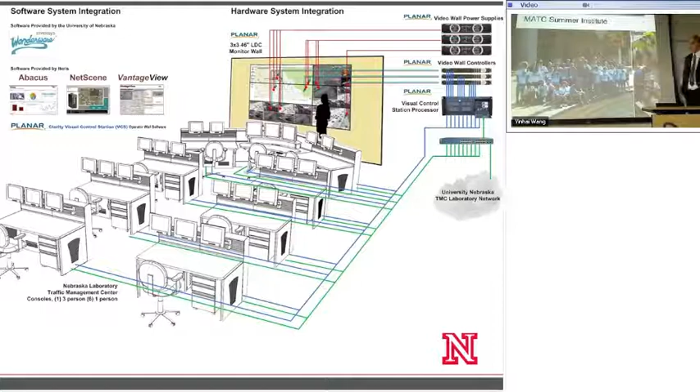We work with students. We have a summer institute that we've run for 6 or 7 years, where we work with teachers and students trying to get transportation into our curriculum in the middle and high schools. We have an after-school program that's been around for about 3 years. It's expanded to 12 schools in 3 different states.

Very, very successful. What's nice about this from a student perspective is we actually hire students to go work with the schools in the after-school program. So the students will go work with middle school, high school kids on these really hands-on experiments, and hopefully get them interested in staying in the STEM fields.

We have an intern program, I think very traditional in most UTCs, where we find students and we find companies that would like to hire students, and we probably have about 40 to 50 interns a year across our region through our program. We also have a scholars program where we look at getting underrepresented groups interested in transportation and pursuing advanced degrees. And we run that every summer as well.

And this last year, we started to videotape all our presentations. We're going to put that on the website. Any student anywhere can benefit from it. We were talking earlier today about sharing courses. We do a lot of shared courses. For example, we have a railway course that we share amongst the universities. And I think that's going to be the future of a lot of the things we're doing. It allows us to get courses we might not have been able to offer at each individual school throughout the consortium.

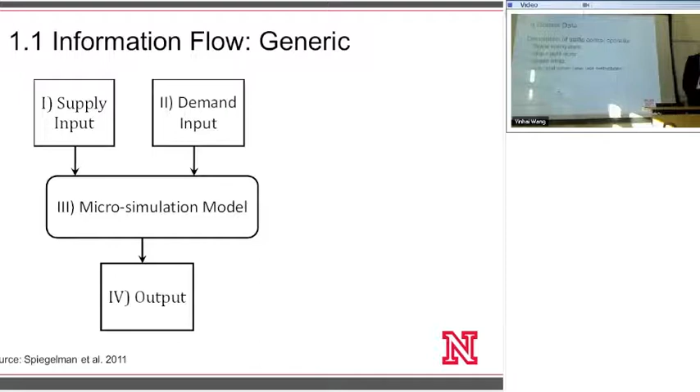So that could be anything, right? Number of lanes, lengths, curvature, channelization. And it's very traditional. I just took a screenshot of one of our networks where we have freeways and arterials. Within that, of course, we also have the control data, traffic signal timings, how much green time, what's the cycle length, all those things. Is there a managed lane or not?

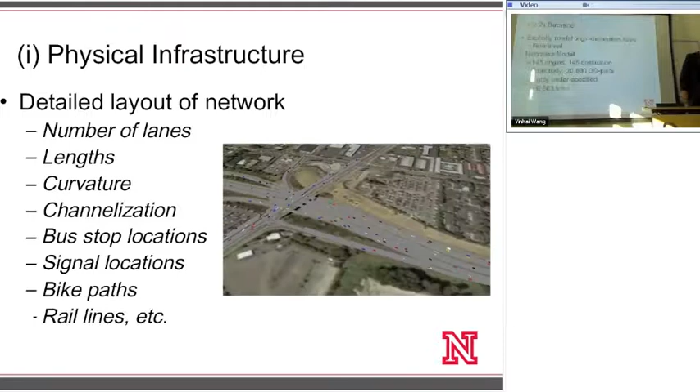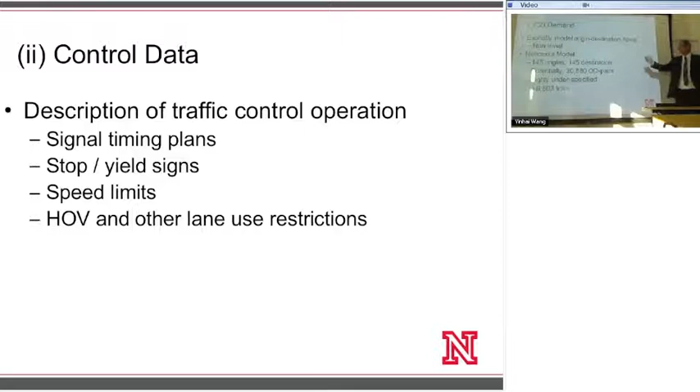On the flip side is the demand. And you get to put the demand in a variety of ways. Most will be talking about origin destination matrices, where people are coming from and where people are going to. I'll be talking about the Nebraska model. We have a model of our entire freeway system in eastern Nebraska, went over on each arterial to the nearest traffic signal. So it's about 70 miles.

Even this simple model of 145 origins and 145 destinations has about 21,000 OD pairs. On our links, we have 68, so we're highly underspecified. It's a highly underspecified problem. We can collect 68 pieces of data, but we're trying to estimate 20,000 things. It can be kind of complicated. And I'll come back to that point in a minute. Many other attributes with it, number of vehicles, vehicle types, all of those things.

So we have our supply, we have our demand. Demand in microsimulation models can sometimes be put in on the simple models as entry volumes and turn proportions, and those are the older style, or you can put them in as OD matrices. And it does make an effect. This is one I use with our students when I'm introducing the topic.

You could go out, as you can imagine, having 2 origins and 2 destinations, measure some flows, 1,000 vehicles, 2,000, and you can say, well, what's the OD? And you could say, well, there's one where you have 1,000 at origin 1 going to destination 1, and 1,000 at origin 2 going to destination 2. Right? So a very simple origin destination matrix. But also, you could quickly figure out, even for this simple network, there's another one where you have almost the opposite. Everyone from origin 1 is going to destination 2. Everyone from origin 2 is going to destination 1. And both will give you the volumes you see.

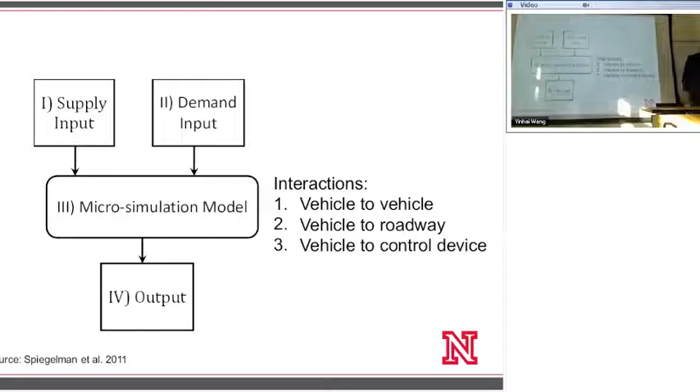And this is a model in somewhat small increments, typically 0.1 seconds, although different models do it at different levels. And really looking at the internal processes, the driver's decisions, the vehicle characteristics, the signal operations. So getting back to that original diagram I had, we have these interactions: vehicle to vehicle, vehicle to roadway, vehicle to control device. That's essentially the microsimulation model in a nutshell. I'm going to try and run ours.

And it didn't work. Okay, there we go. So here's a picture of, we just took one place out of this Nebraska model. It's about 60 miles, so this is one of our interchanges. And they can get pretty, you know, they look great. This is VISSIM, very good program.

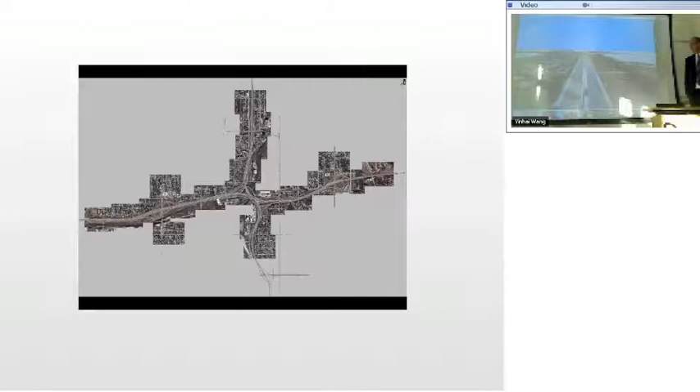You can make it look very nicely. You can do trucks, you can do cars. We take these out and show people, and they like them. It makes sense. It looks nice. I think the real question though is, how good is it? It looks great. And the question we always have was, is it really doing what we want to do? And that's sort of the focus I want to talk on today.

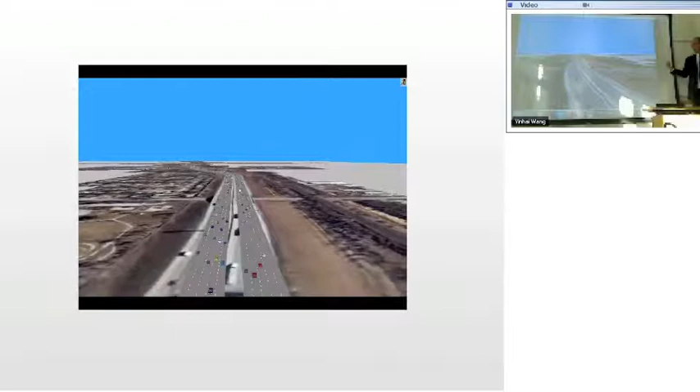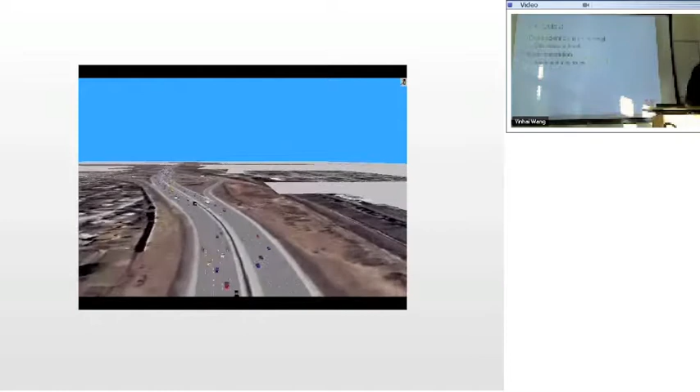How accurate do you have to be, or how can you make this model as good as it can be, is probably a better way of saying it. So you run the model, you get output, you can get a lot. You can pick a time interval. You get to decide the form and the frequency of the output.

As you can imagine, there's three types. You can get point measures. What's the speed at this point? What's the throughput at this point, or at these locations of points? You can get link-based. What's the travel time on a link? What's the space mean speed?

You can do corridor system measures. What's the average vehicle speed along a route or along a corridor? What's the speed or travel time from an origin to a destination? You can get average person delay. There's all kinds of data you can pull out of these models if you want. The user gets to decide, and it makes sense. You have all the information from that simulation. You get to pick what you want.

Of course, it can be overwhelming just how much data there is. So part of the thing you have to do as a modeler is identify how accurate the performance measure needs to be. So you're getting this data out. How accurate does it have to be? And I'll come back to this theme as I talk today. And there's another caveat I always talk about. You also have to understand what you're trying to do. We always talk about we want as accurate a model as possible.

Sometimes it's not as critical to be absolutely accurate. Sometimes it's okay to be relatively accurate. So the question, does it all have to be accurate? And the answer is, we'd like it to be, but does it really have to be? And it comes down to what you're doing.

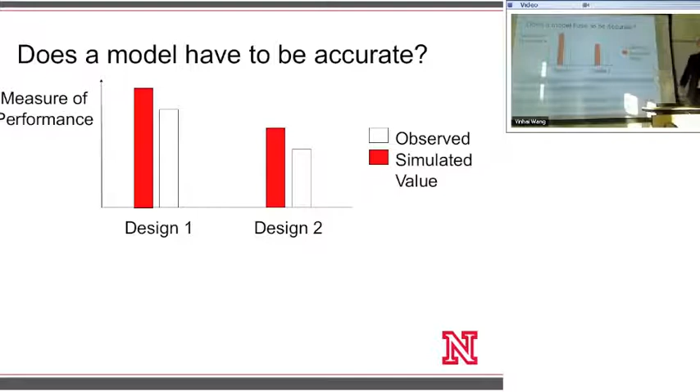You can see that the simulated data in this case overrepresents what's actually going on. But the reality is the relative benefits of both, whether observed or simulated, are the same. So sometimes, as long as you're looking at relative benefits, the model, whether it's a microsimulation or macroscopic, may not need to be accurate. It just has to be accurate in relative terms. It allows you to pick the right choice.

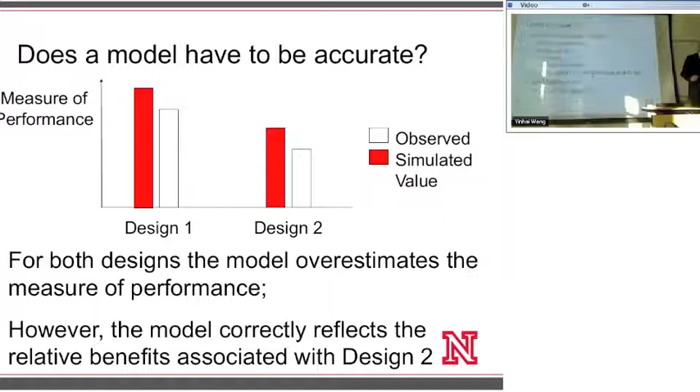So lessons learned: we don't need an accurate model. We sure like it to be internally consistent. I always say it needs to fit the need, right? Is it planning? Is it operations? Are you doing safety? And it should model reality. I'll come back to this last point at the very end of my talk.

And the other thing is, as I discussed, we have lots of data on these models. And as the title of my talk indicated, we have lots of data. We have our ITS data. We have the ability to collect a lot more data than we did 20 years ago. In fact, we're collecting so much we're hardly using any of it. So what do I mean by ITS data? I want to talk about the types and advantages, and then how that relates to microscopic simulation.

So we have point data, and I think you're all very familiar with that. We have video data, we have inductance loops. In Nebraska, we use a lot of radar to get our data. Our state DOT gets their data for free because someone's gone in and put up all the radar detectors for them, and they just wanted permission to be on the right of way. They collect the data, sell it to others, and give it to the government for free. Completely different way of doing things. And you get information like spot mean speed or throughput.

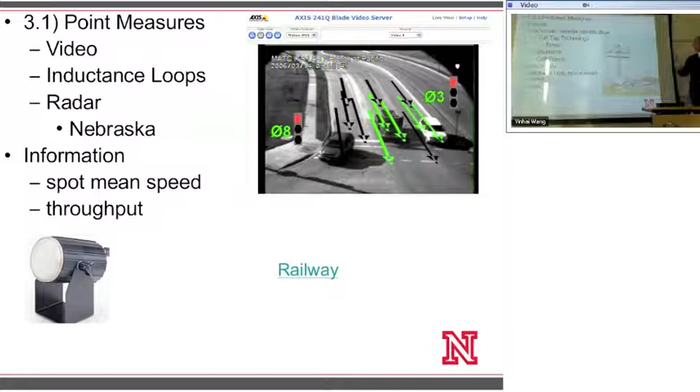Talk today about Bluetooth, right? Very similar technology. Cell phones. This stuff is becoming more and more prevalent. It's a lot nicer because it gives you actual information over space, right? What's the travel time? What's the space mean speed? What's the delay? Those types of things.

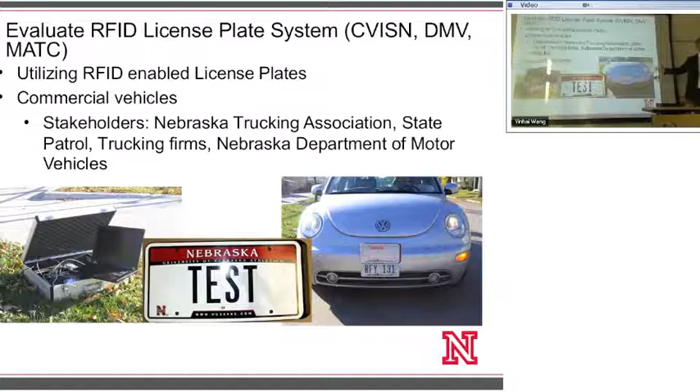We had a project in Nebraska where we were looking at actually putting RFID into our license plates. And this actually came about from the trucking associations, because they already have RFID on their trucks. They have license plates. They said, can't you put them together? Is there a way we can work together to work this out? So technologically feasible, politically I'm not so sure about. But you may see this in the future where our license plates actually have information on them, much more than just the visual part of it.

Another example, this is a summer project we did about a year and a half ago. Commercial vehicles, if anyone's familiar with the trucking industry, have a lot of GPS data. They get information on where your truck is, where the engine is, what the engine's doing. Is the truck going fast? Is it going slow? Are they doing hard accelerations? So they monitor the drivers to make sure the drivers are where they're supposed to be and are driving the way they're supposed to be.

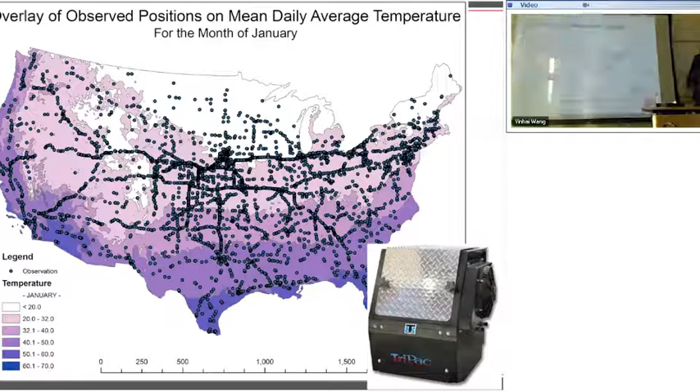And the whole industry has basically set up a system where they take that information, bring it to a central source, and provide it to each other. So they actually have very good ideas of what's going on, travel times for trucks, delay times for trucks, where congestion is. They put out a top 20 congested list, and they give it to the government every year. This is where our trucks are having trouble. This is where you need to put your money. They put out maps on where their congestion is. So it's very interesting that this data the government used to collect, now the private sector is collecting, sharing amongst themselves, and using for policy.

So lessons learned: there's a lot of ITS data collection historically by the government. What we're finding is private sector companies are collecting the data themselves, using that and providing it to others. A lot of potential for public-private partnerships. What is important for this talk is there's lots of very robust individual data, which mimics the microsimulation outputs. So not just point data, we're actually getting link and route type information, and that's pretty key for doing calibration.

So having more robust individual data allows you to think about things such as the mean, the variance, the distribution of data. And if we have that, and that's what microsimulation gives us, it gives us an opportunity to compare how our simulations are doing against the empirical data, and not just one measure, but maybe other measures as well.

When I say lots of data, I mean terabytes. Our labs probably have right now 18 to 20 terabytes, and we're running out of space. The issue of how you manage this data, I'm not going to talk much about today, just that we have data. Trying to turn that data into information you can use is a whole other topic. How do you archive that?

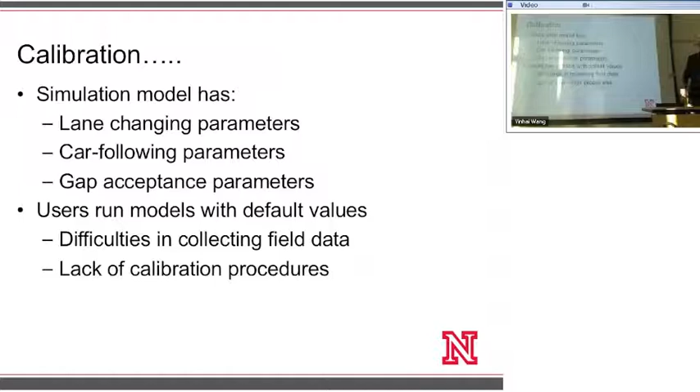So getting to calibration, when you look at a simulation model, they have all kinds of parameters: lane changing parameters, car following parameters, gap acceptance parameters, and I just listed a few here. There's a large number. A lot of times users will just run the model with default values. Sometimes there's difficulties in collecting field data, or just a lack of calibration procedures. I'm hoping to show today that it's probably a bad idea. My experience has been that it rarely replicates field conditions to the point that some people would like.

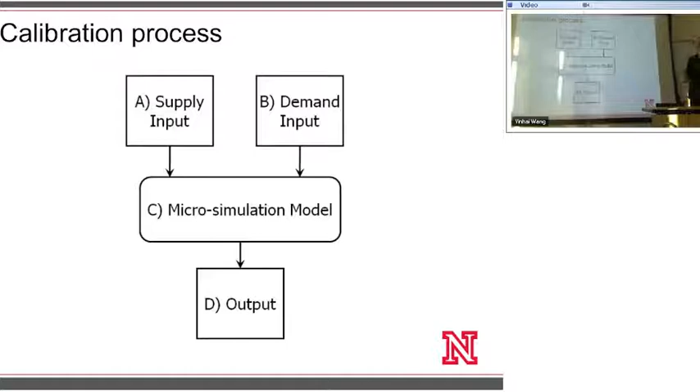And so a lot of our work is discussing ways of calibrating, but also showing the need for calibration and validation. So getting back to our diagram, we have supply, we have demand, we have this microsimulation model, we have output.

Setup, well, go get some data. So you could go collect it yourself in the field. You could use some ITS data. What types of things can you use? We saw today you could use queue length, you could use speed, you could use travel time.

Which one's best? Well, it depends, I guess, on what you're trying to model. Right? What is critical to you? Are you doing a safety analysis with your microsimulation? Are you doing a speed analysis with your microsimulation? What exactly are you after? But there's a lot of things out there you could use.

So you might take every link, see what your observed was, what your simulated was, and this is actually sort of a percentage error. So if it was 0.1, it means about 10%. You're off by about 10% on average over all your links. So that's the mean absolute error ratio, and I'll come back to that in a minute.

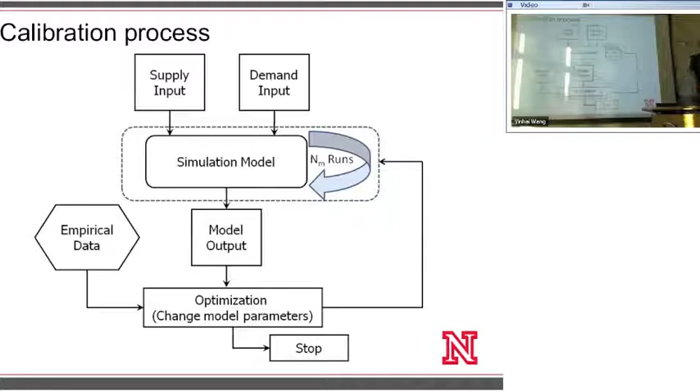And if you don't like it, then you go back and you repeat it. You can adjust the parameters until the data matches, which makes sense. So you go back, you put a new loop in, you go back up to the simulation model, you make some changes to the parameter, you run the model again. Right? You just keep doing that until you find some reason to stop. You're satisfied with the numbers, statistically it's fine. You have a low mean absolute error ratio.

So that's basically the calibration model right there. So you find the lowest mean absolute error ratio, you can run a t-test. A quick question would be, why not all combinations, right? Why don't you just run every combination of parameters and get that? That'd be fun. That'd be a good grad student project, right? So you can argue there's usually 30 parameters you could change. I'm not going to read these out, but there's a large number that you have the ability to change and affect the results.

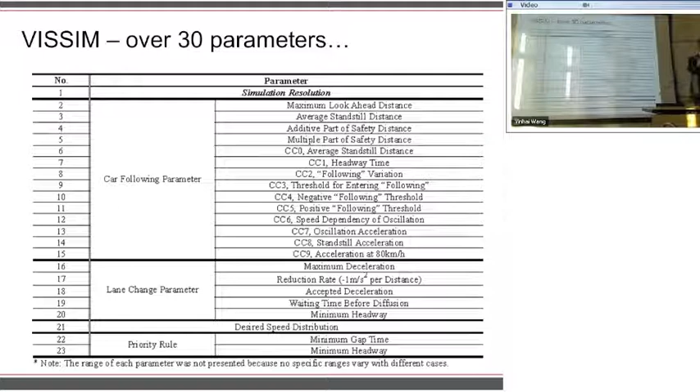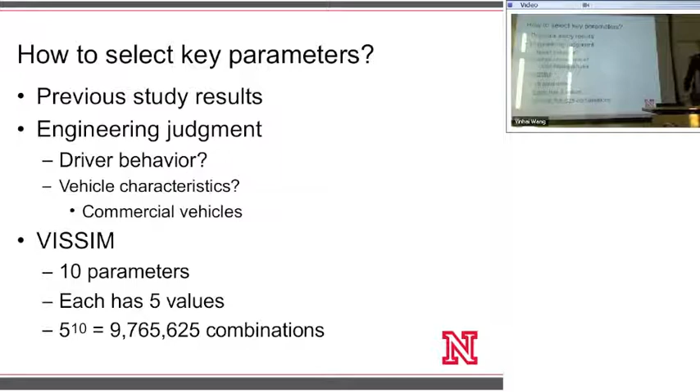How do you get the key ones? Well, you can go to previous studies. You can use engineering judgment. You know, I'm interested in driver behavior, and this is what I'm looking at, so I'm just going to worry about the driver behavior parameters. It could be vehicle characteristics, right? The vehicles there are calibrated in this region of the country, and our characteristics are different, so I want to calibrate to those. But even if you took VISSIM with 10 parameters and each had 5 values, it's probably about 10 million combinations. So the ability to do every combination is not possible. So I'm going to have to do some type of optimization.

One caveat: where did the demand OD matrix come from? That's sort of where I started from. I started off with this OD and said, these are difficult to get, even for a simple two-node example. I'm sure the students all know where the OD matrix comes from. And that's that second arrow coming back. We estimate. We get synthetic ODs. We estimate them from volumes. We have models for doing that. And where does the data come from? Well, it comes from the ITS data, typically, some type of volume, some data you're using.

So you get this sort of double loop where you're using the empirical data to identify your OD, you're running your simulation model, you're getting your model output, you're seeing how good it is, and then the question comes up, should I be optimizing on my OD matrix as well? And we have done that work as well, and you really are into 2 types of optimization. You hold the OD constant and optimize the simulation model, or hold the simulation model constant and optimize the OD. I don't think there's a right or wrong answer other than to know the ODs are not easy to get, and they obviously are going to affect everything you do. A lot of the work we do, I try and keep it simple so we don't have a large number of options on the ODs. So a lot of corridor work, those types of things.

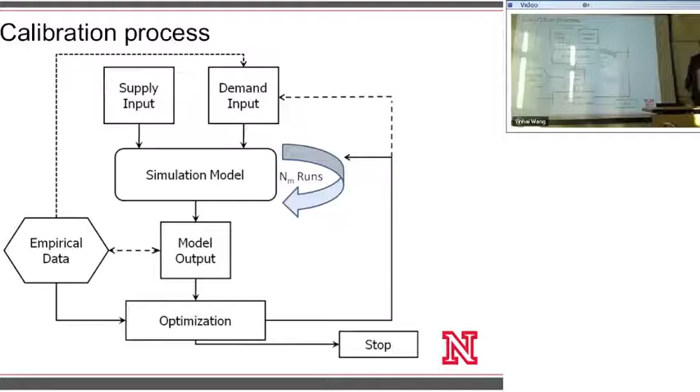So calibration methods. When I started out doing this stuff all those years ago when I was in the student seats, we did it manually. It's better than the default. I will say it's tedious and time consuming. You can only do a small set of parameters. I don't recommend it, but that's what we used to do. It would take you a month of playing around, hopefully kind of intelligently, running the model, seeing what the results were. And I say it took a month because that's probably what most people had, a month or 2 to try and get the model working. And they were much simpler.

But when you look at the loops that I showed, you can certainly see, well, I could do that with a computer. Right? I can automate this process. In fact, if you have the right set of computers, you can send a simulation to each computer, run it, get the results, change things. And so that's sort of what we do. You could do an experimental design, and we certainly looked at using things such as Latin square design, where you identify the combinations ahead of time. So instead of 10 million, you're doing 300, 400, 1,000.

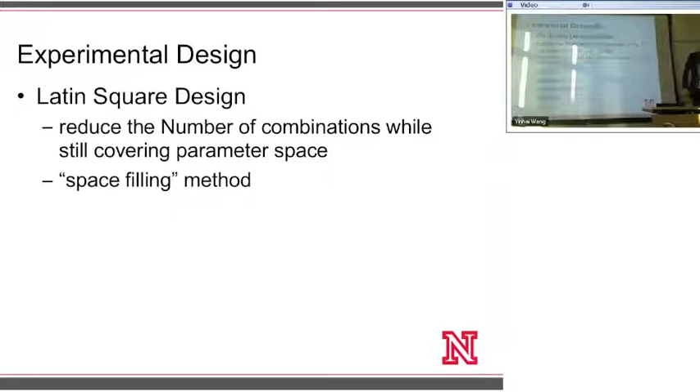What we tend to use now, though, is more of an optimization function. So we've identified what our objective function is. It could be lowest mean absolute error ratio. It could be something like 90% of link travel times are within the empirical confidence intervals, something like that.

The optimization, there's a whole bunch out there. There's reduced gradients, simplex algorithms. I've used all of those. I'm going to talk today about genetic algorithms because it's been a fairly popular one. But I will say that almost any of the ones we've tried have all come up with good answers in the process. So there wasn't any of those that we've used and we said, oh, that's awful, we shouldn't do that. So I'm going to do a calibration example for you.

Okay. So we take our traditional measures of similarity. I'm going to pick the mean absolute error ratio that I showed earlier. First question, what are you interested in? Are you interested in the mean? Are you interested in the distribution? Right? And the answer is always, well, what do you want from your model? Do you want to just get an average value? Do you want to get the distribution?

Are you interested in reliability, the distribution of speeds? Are you happy with just the mean speed? Are you interested in the 85th percentile speed? That's the sort of question you have to ask yourself before you do the calibration. That's going to define how detailed you want this. In this case, I'm going to look at the closeness of the observed and simulated travel time distribution. So I've made the choice that I'm interested in the distribution of travel times. That's what I want my model to be able to replicate.

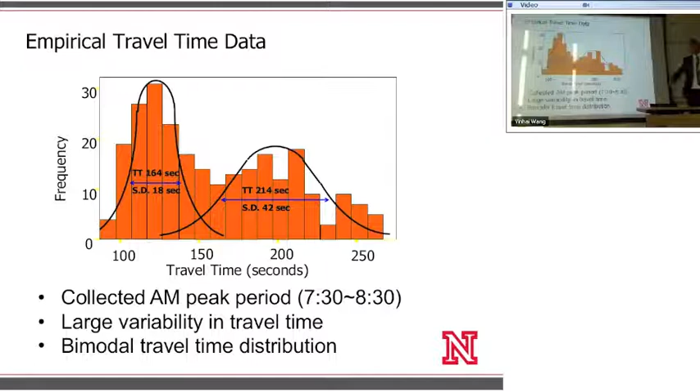Can we adjust the parameters so that what the model is outputting is what we're seeing in the field in terms of distribution? And you can imagine if we're doing the distribution, then the means will also be correct. If the distribution is close to correct, the measure of central tendency will also be close to correct. So that's our process. We run the simulation model n times, it really depends on the metric, and we usually pick 10, and that seems to work well. But again, it depends on how accurate you want your calibration to be.

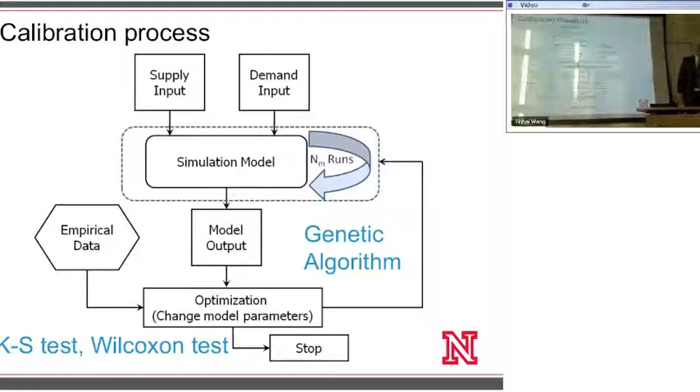So here's our automated procedure. I'm going to go through this fairly quickly. You have the genetic algorithm, you have an initialization. You pick a bunch of potential parameter sets that could work. You could pick them through engineering judgment, from previous work, or make them up randomly. In our case, we picked 30.

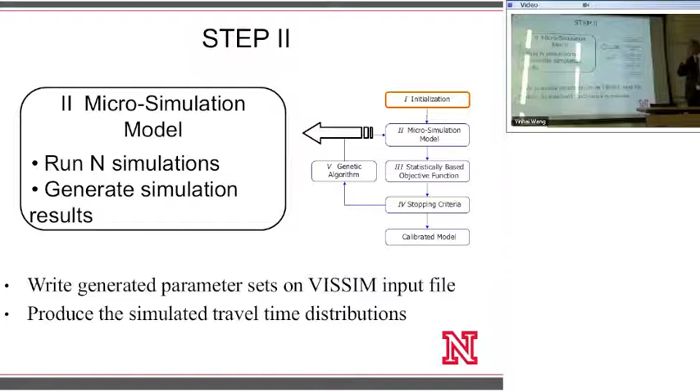I'm not going to go into the details of the genetic algorithm, but there's ways of picking numbers, like the mutation probability and crossover probability, that are going to give you new parameter sets. So you pick a set of parameters, you run the microsimulation, and you get results. You then compare the results statistically using the KS tests and the Wilcoxon test, and you say, of all those 30, did any of them pass our test? Basically the way the genetic algorithm works is if they did pass a test, they have a higher chance of being adjusted and sent in for the next iteration.

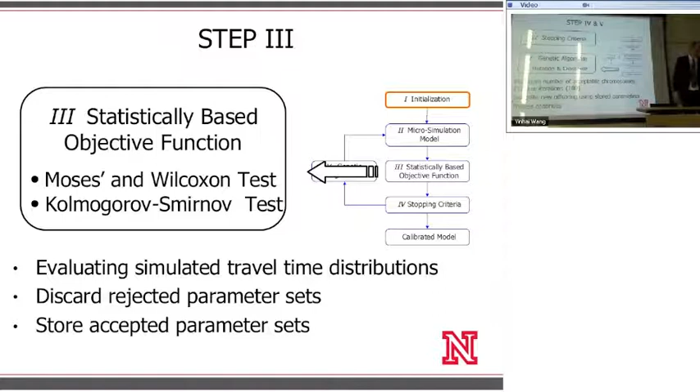And we'll run this over and over again. So we run some tests, we get some mutations to our parameter set, we change the parameter set in some way that mimics biology. We get new sets, and we just keep running this over and over. In our case, we did 100 iterations. And the idea is that if something's good, you continue it to be good, but you do have some randoms to see if there's maybe somewhere else that you can get better results.

So that's the genetic algorithm, and like I said, you could use a simplex algorithm. There's a number of optimization methods to mimic this, to change this thing as you go through. The next thing is from a student's point of view, right, you push the button once, and it just does it. And like I said, if you're doing this by hand, it's not any fun. But this allows us to do thousands of these runs and look at it. We're not doing a million, all different combinations, but we do get to look at the sample space and try and find ones that work.

So what are the results? Well, the first thing was if I just ran the model with the default parameters, so I just took VISSIM off the shelf and ran it for this network, there was a 21% mean absolute error ratio. So on average, the travel time was off by 21%. This is actually a really good number. We've run it where it's been off 100, 120, 130, just taking the default parameters.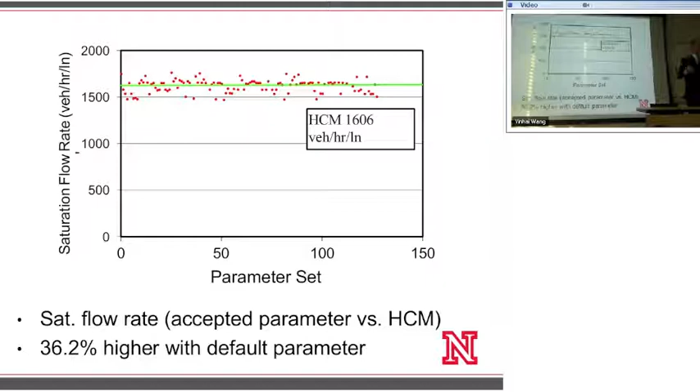So lessons learned: my big thing is, you don't necessarily have to use the default values. It might be good to go calibrate it at least some way. There is ITS data out there. You can do it statistically based, in this case, bimodal travel distributions. Simple metrics may not be enough, but you may have to do additional analysis for the candidate parameter sets.

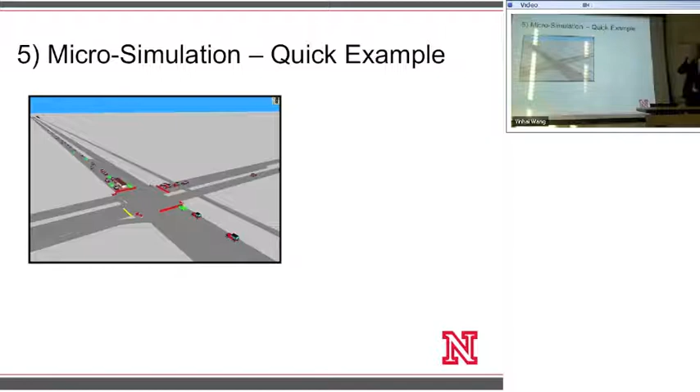So there is a potential to use statistics to help you make the choice on the calibration. But it also brings up the question, if you have lots of parameter sets that give you the same statistical results as the empirical data, how do you pick between those? Okay. And what I want to do is finish off with one last example. So I started off talking about VISSIM, and I showed you a fairly sophisticated model.

I want to talk briefly about CA models, cellular automaton models. They're very simple. Basically, they take a roadway composed of cells. Cell size is about 7.5 meters. The cell is either empty or occupied. The vehicles are moved through the network by a set of rules, and I'll talk about them in the next few slides. And velocity is an integer number, so your vehicles can only go 0, 1, 2, 3, 4, 5 cells per second. If you take the numbers I have there, it works out to 0 to 135 kilometers per hour.

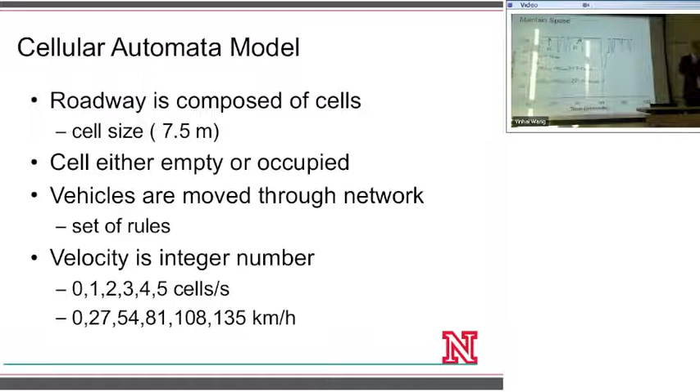That's a CA model. The rules: the first one, over time, you maintain your speed. So if you're at the maximum speed... let me take a step back. So this is a CA model. On the y-axis is speed in kilometers per hour. On the x-axis is time in seconds. So it's just a model of one vehicle following these CA rules.

What it says is if you're at a maximum, there's a probability of 1 minus p noise that you'll continue at that maximum speed, and there's a probability of p noise that you're going to drop. So you can see at point A, the vehicle is maintaining it. At point B, it suddenly drops 1 cell per second, and then it goes back up. So there's a probability that you're going to maintain your speed.

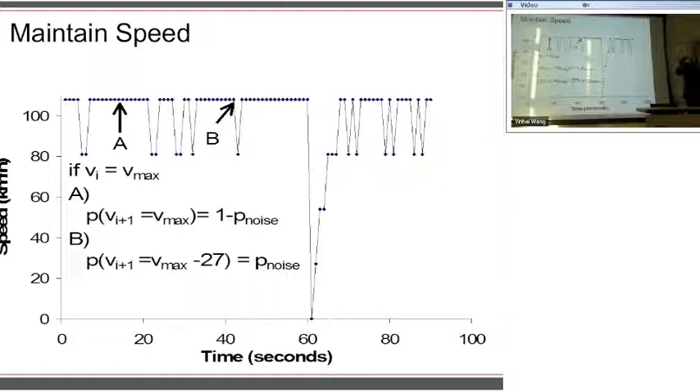There's a deceleration rule. Basically, you can't hit anyone. So if someone pulls in front of you or you come up on them, you can decelerate. It's a function of the gap size and that p noise. And you can see here that this vehicle went from 110 or so, 115 down to 0 in the space of 1 second. Okay, so that's a CA model, and we set it up, we pull the numbers out.

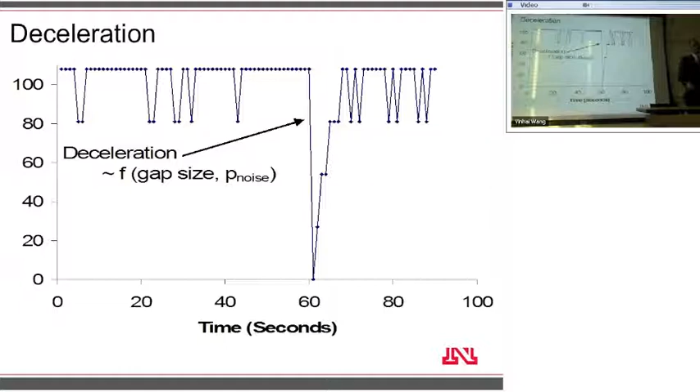And then there's an acceleration rule. If you're going slower than you want, than the Vmax, you can accelerate if possible. There's a probability at every time step of increasing, and there's a probability of maintaining your speed. And you can see that the vehicle that accelerated at A is moving up at B at stated speed. And so it's a random thing, and it's all one parameter, p noise.

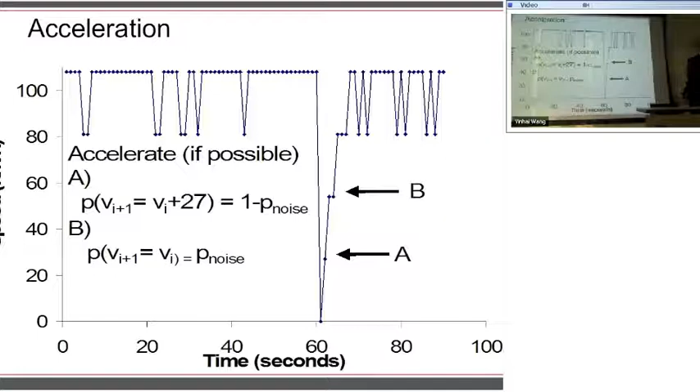Okay. So you now know everything about cellular automaton models. They're very fast because they don't really worry about what the vehicle is doing, is it slowing down, keeping a safe driving distance. They're also called particle hopping models. They're very granular. Here's an example: speed in kilometers per hour on the y-axis, time in minutes on the x-axis. You can see the vehicles are going from 110 to 0 in a second. They're hopping around. The modelers would say, well, that's not realistic, but on average it is.

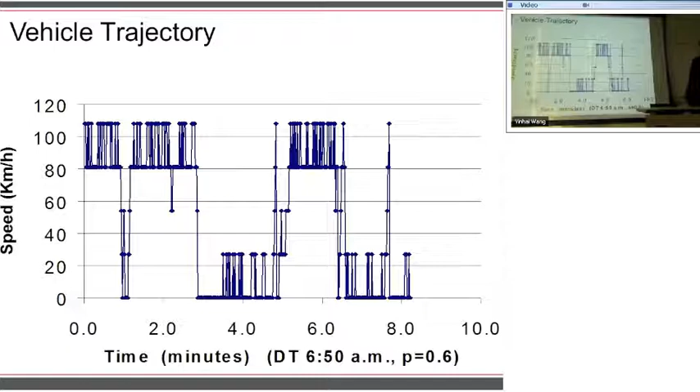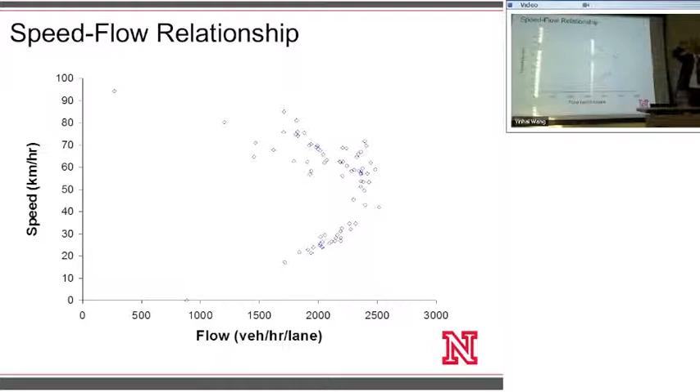You can take the data because it's individual. Aggregate it 15 minutes, 3 minutes, 10 minutes, 20 minutes. Of course, you still get the same; aggregation won't change the flow. What do you notice about the capacity, though, or the maximum flow?

Well, if you... That's right. So, it follows what we know, right? Why does HCM always have about 15 minutes? Because how you aggregate affects your result. This is all the same data, I just aggregated it differently. If you pick 3 minutes, you get a much higher capacity than if you pick 20 minutes with the same data. Why is that?

Well, for 3 minutes, you can get a lot of flow, and then you multiply it by 20, you get a fairly large number. Right? So, again, for the students, there's a reason why I say pick a standard, right? Pick 15 minutes so you can compare apples and apples. So it shows what we know, and it's a model.